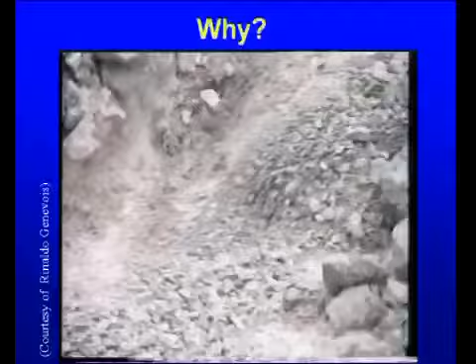I'm going to present an approach to the study of granular fluid flows I developed together with Jim Jenkins. And we tried to take into account the presence of two particle species in our flow mixture. Before going into details of the model we developed, I just want to give some explanation about the motivation that took us to the study of this kind of problem.

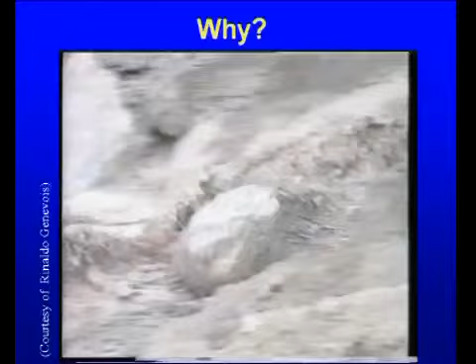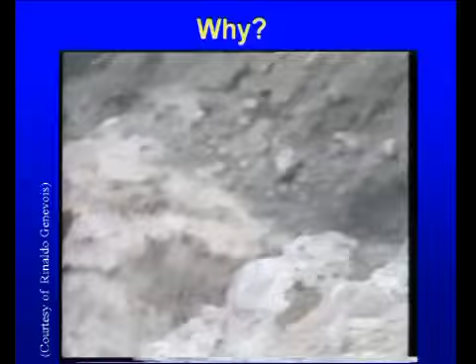I am a member of a research center at the University of Trento, which tackles the problem of the hydrological safety of basins in the alpine area. And one of the big problems we have in our area is the study of debris flows. This is a typical debris flow that took place some years ago in the Italian Dolomites, not far from my university.

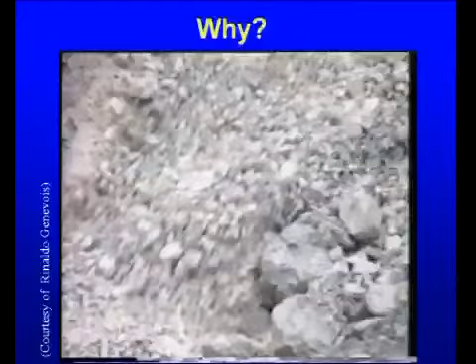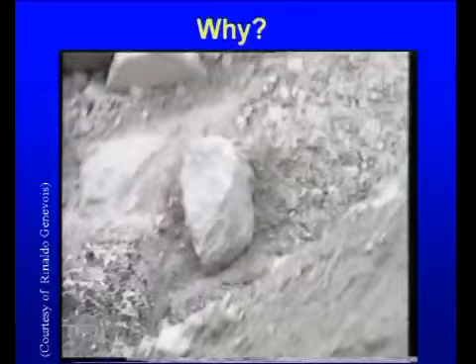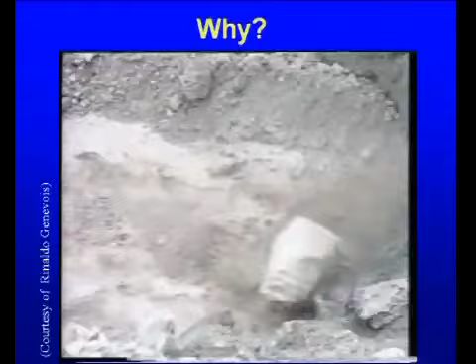What we can see looking at this kind of flows is that they are very complex. They usually take place on very steep slopes, so we have to use models that are able to take into account the presence of the slope. We have the presence of water, so we cannot renounce modeling the interstitial fluid. And we have the presence of more particle species. So in most of the cases, the models that do not take into account the presence of distribution in the size of sediments cannot give good results.

The problems related to debris flows are many. We have problems related to the triggering of the flows, to the transfer of these flows, so the transportation, and to the deposition. What we are going to focus on in this talk is the propagation of debris flows. And we will make the hypothesis of flow in fully developed conditions, so we will not take into account the variation in time of the phenomenon.

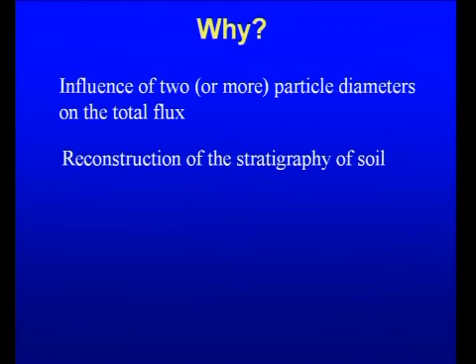The main thing that we are going to investigate is the influence of having two or more particle diameters on the total flux of the flow which is propagating downstream. This is because we intend to see if the presence of more particle species can enhance or reduce the amount of material that can propagate inside the channel, which is a very important design parameter when we want to work on the safety of river basins.

Another thing that we would like to be able to do is the reconstruction of the stratigraphy of the soil after this kind of flow stops. After that, we have the resting of the material that generally takes place on the alluvial fans. This is not taken into account at the moment, but this is something that we would like to investigate in the future.

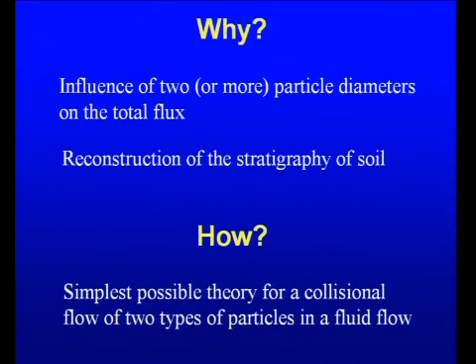How do we want to study this kind of thing? Which are the methods that we want to employ? We want to apply a theory which should be as simple as possible, just to have an idea of what are the parameters playing a role in this kind of flows. We are going to consider two types of particles, so we will have two particle diameters and two particle masses in a flow driven inside a fluid. So we will make the hypothesis of binary mixture, as I have already said.

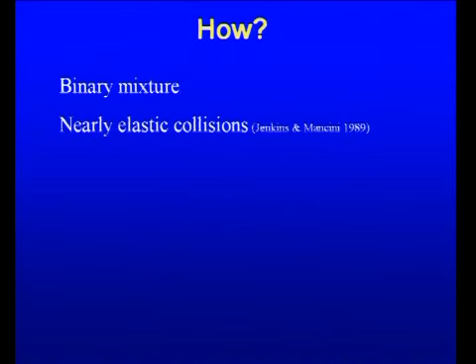Another simplified hypothesis is considering nearly elastic collisions, according to the theory proposed by Jenkins and Mancini. In order to obtain quite simple equations that can be solved without too big effort, we are going to take into account small differences in diameters and masses, where small differences mean that the maximum diameter does not exceed 2 times the smallest one.

And this allows us to apply some simplifications to the theory of Jenkins and Mancini that were already introduced by Arnarson and Jenkins. What we added to the simplification of Arnarson and Jenkins is the presence of the slope of the channel in order to take into account the effect of gravity in the momentum balance.

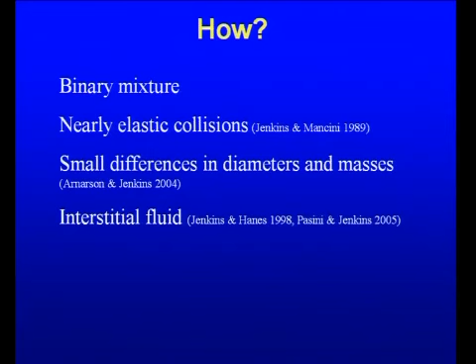Another thing that we, of course, need to take into account in modeling this kind of flows is the presence of the interstitial fluid, and in doing this, we follow an approach that has already been introduced by Jenkins and Hanes and by Pasini and Jenkins, but again introducing the role of the slope of the channel, which was not taken into account in the original works.

And our scope is the one of being able to describe flows that can be driven in horizontal and inclined channels, and we would also like to be able to study flows that can be driven not only by gravity but also from above, which means that we may have a layer of clear water flowing on top of the flow, which can be translated in the presence of a Shields parameter that, of course, is an important driving force

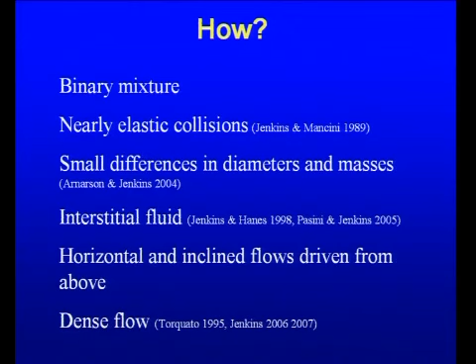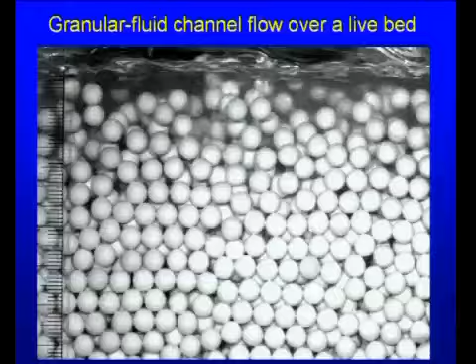in our momentum balance. Moreover, since these kind of flows are characterized by high density, the standard kinetic theory may fail in describing this kind of flows, so we introduced some modifications to the radial distribution function proposed by Torquato in order to take into account what happens in a dense flow, and we take into account also the scale distance L that Jim introduced yesterday, and that has to be introduced in the energy dissipation balance of the particles.

Before presenting the equations, I'm just showing a kind of experiment that we carry out at the University of Trento. This is carried out with one single particle diameter. We are planning to make in the future experiments also with 2 particle species. What I am interested to focus your attention on is the presence of lower layers where we have high concentration and an ordered structure in the flow.

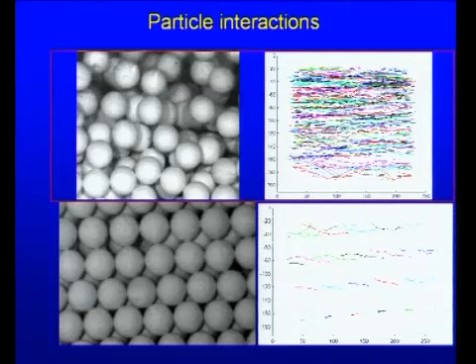So we have a sort of clustering and some chains of particles that are flowing, an upper part where we see collisions, and another part here on top where we have the dominance of turbulence and where we have to take into account, of course, the role of water. And here again 2 snapshots of the higher and of the lower part of the flows, just to show which are the very different features of the moving of the particles in these 2 conditions that are both present inside the same flow domain.

Let's start presenting the variables included in our models. Of course, we have 2 particle species, so we have 2 diameters, RA and RB, and the same we have to introduce for the masses. Then we introduce 2 parameters, the R and the M, that take into account the variation of the mass and the radii of the 2 species. And as stated before, these 2 quantities should be small in order to be able to apply the simplified equations that I'm going to show later.

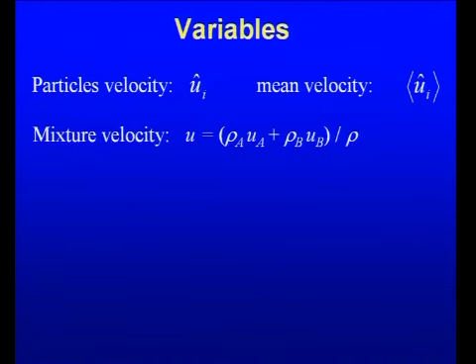We have, of course, the need of defining the number densities of the 2 species, which are NA and NB. They are connected to the mass density by means of this simple relation, and of course we can define also the volume fractions. What is more interesting to show is the fact that we have to define a mixture velocity, which is a sort of composition of the velocity of the 2 species in which we take into account the different density of the 2 species.

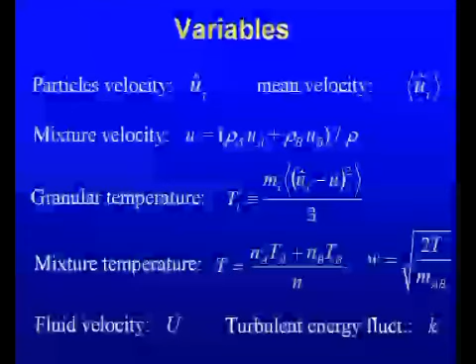We have to define a granular temperature, which is a measure of the kinetic energy of the fluctuations of the particles. The small u represents the velocity of the particles, while we'll see later the capital U represents the velocity of the fluid. And then after defining the temperature of the 2 species, here I represents A and B, we have also to define a mixture temperature, which was defined assuming the hypothesis of equipartition of energy. So this is something that we already found in Jenkins and Mancini work.

The first balance equation we have to introduce is the balance of particle momentum, which is a quite standard equation. We have the gradient of the particle pressure, the gradient of the fluid pressure. We have a term representing the gravity force, and in this term, of course, we have the presence of the cosine of phi. Phi is the slope of the channel, because we have to take into account that the normal to the bed of our flows does not coincide with the direction on which gravity is working.

And then we have a term which is very important, which is connected to the turbulent suspension of particles determined by the presence of the fluid and the turbulent fluctuations of the fluid. The closure relations we need involve, of course, the particle pressure, which is defined in a standard form. w represents the square root of the granular temperature. The term we have more is this 1 minus 3x δr, where x takes into account the number densities of the two species, and this is a term that takes into account the presence of the two particle species.

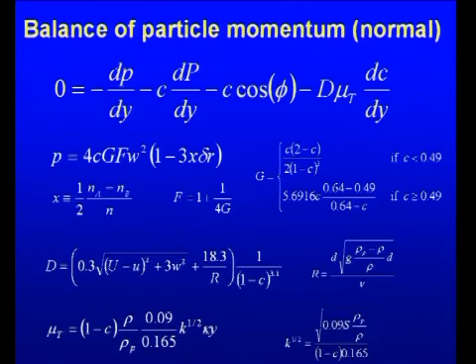This is a turbulent viscosity coefficient in which we used a very simplified expression that is based on the very simple law of the wall, which is not the best way of modeling turbulence in a fluid, but is something that enables us to obtain some simple coefficients and simple expressions that can be solved quite easily in order to get to a result.

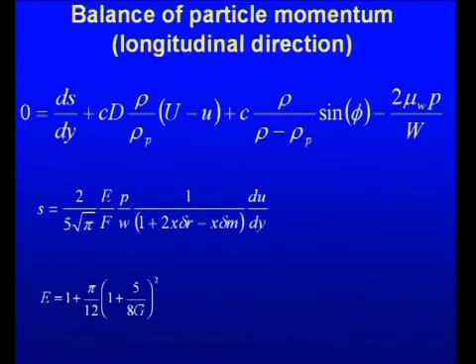In a similar way, we derive the balance of particle momentum. We have again a term including the drag, a term including gravity, a term including the shear stress of the fluid, and we included also a term here on the right-hand side that takes into account the friction that the flow has on the sidewalls of our experimental channel, or of the real channel we may analyze. We have the closure for the shear stress, which follows the classical kinetic theory, except for the presence, again, of a term that takes into account the presence of the two particle species.

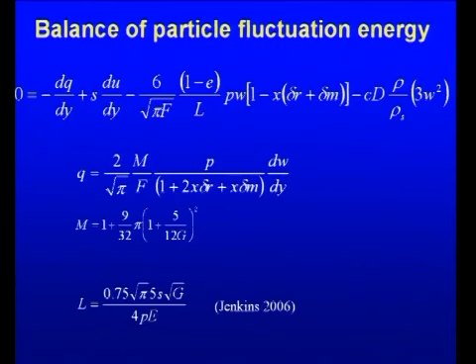We have here the balance of particle fluctuation energy, where we have the diffusive term, a production term, a dissipation term related to the particles, which includes, again, the effects of the two particle species, and includes the scale L introduced yesterday by Jim, which is expressed in the formula reported here.

Then we have the balance of fluid in the normal direction: gradient of the fluid pressure, gravity, and turbulent suspension. This term is exactly the same that we found in the balance of vertical momentum proposed for the particles, but with an opposite sign, because, of course, this is a term that transfers momentum from one phase to the other.

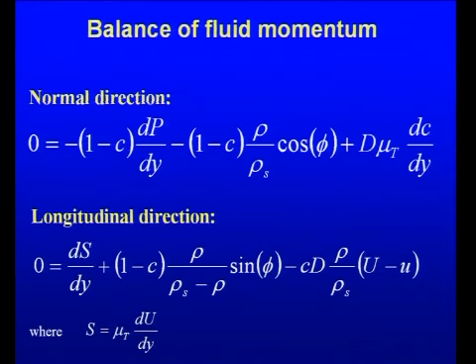And we have the longitudinal momentum, which takes into account again the gravity and the drag force determined by the difference of velocity between fluid and particles, where the shear stress in the fluid can be defined as the product of the eddy viscosity and the velocity gradient of the fluid.

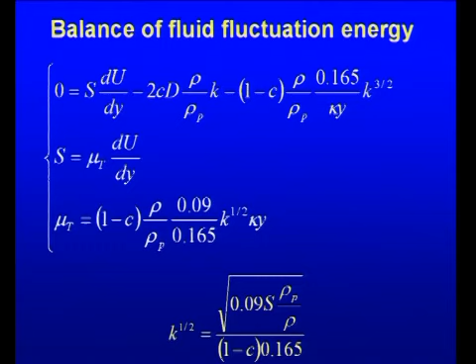Finally, we have a balance of the fluctuation energy of the fluid, in which again we have production, dissipation, and diffusion of energy. And this balance can be used together with the closure relation for the shear stress and with the equation expressing the eddy viscosity in order to obtain K, which is an expression for the strength of the velocity fluctuations of the fluid.

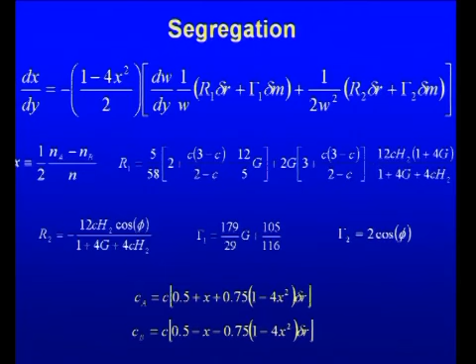Finally, we have the equation for segregation, including the parameter x we saw before, which includes the number densities of the two particle species. This is an equation which is identical in form to the one proposed by Arnarson and Jenkins some years ago, except for the presence in the coefficients of a term that determines the presence of the slope of the channel, which was not taken into account in the original formulation. And after evaluating x, we are able to evaluate the volume fraction of species A and B using these very simple formulas.

So putting all the things together, we are able to write a system which is not very complicated, even if long. It is a system of 9 equations, but it's a first-order differential equation for which it's quite easy to find also boundary conditions.

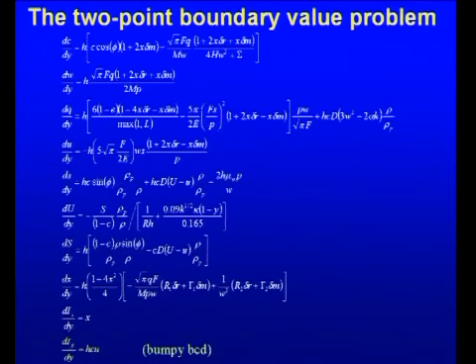We have the unknowns, which are the concentration, the velocity fluctuations of the particles, the flux of energy, the velocity of the particles, the shear stress of the particles, the velocity of the fluid, shear stress of the fluid, the relative density of the two species, and then finally a balance of mass, which is necessary in order to be sure that we are conserving the mass of fluid, of course. And in the case in which we want to study a problem on a bumpy bed, we also have to add a further equation I'm not going to talk about because we don't have too much time.

We can use this system in combination with a few boundary conditions, which are quite classical. We have a condition on the particle pressure on top, which is connected to the possibility of having ballistic trajectories on top of the flow. Then we have a condition on the shear stress of the flow of particles and of water, a condition involving the flux of energy, and again a condition involving the mass balance.

And at the bed, with analogous conditions, we can impose either the stress ratio or the concentration at the bed. The results are quite similar. We have to impose the flux of energy of the particles. We impose a zero velocity of fluid and of particles, and again a condition involving a mass balance. I will skip this.

And solving this system, it is possible to obtain some results. Here I am showing the results of a granular flow in which we have a single species. These are the graphs reported in blue in the 3 panels. And then the solution in the case in which we have 2 particle diameters having a ratio of 1.1.

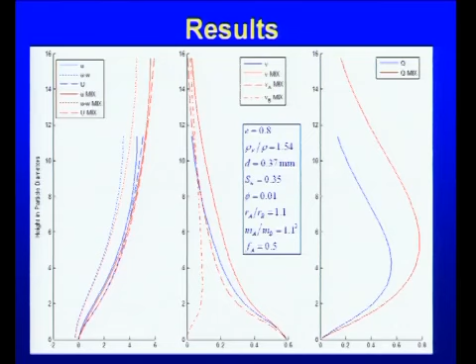So the depth increases, even if in the lower part of the flow the 2 solutions are quite similar. We have an increase in the case of the mixture of the total concentration, which is represented by these continuous curves. So we have to compare the continuous red with the continuous blue, which is for the homogeneous case. And of course, this determines a big increase in the particle flux in the problem in which we consider 2 particle species. So same boundary condition, only difference we introduce 2 particle species, and we have a flow rate which is more or less 2 times the one we have with a single species.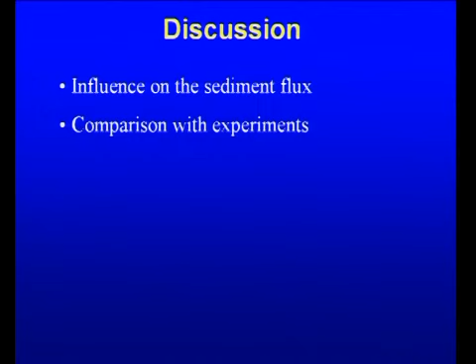I don't have more results to show you, unfortunately, because we finished this work just a few days ago. I'm just going to give a few points for a discussion. So we notice the big influence of the presence of more particle species on the sediment flux inside our flows. But of course, we have also some limitations. The first big limit is that we have not yet made comparison with experiments. This is something we are going to do in the future. We should be able, in the future, in order to model in a better way this kind of flows, to change the equations in order to take into account also ratios of diameter and mass that are bigger than 2.

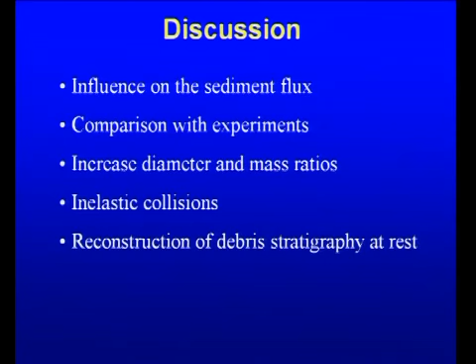Another thing we want to take into account in the future is the presence of inelastic collision. Our model works for nearly elastic collision, which means that the coefficient of restitution should not be smaller than 0.8, which may not be very appropriate in the kind of fluid we are studying, especially if in water. We would like to build the debris stratigraphy at rest, and this is all.

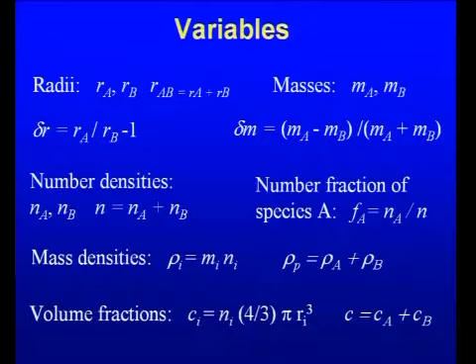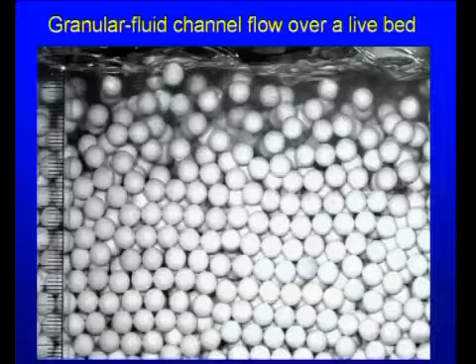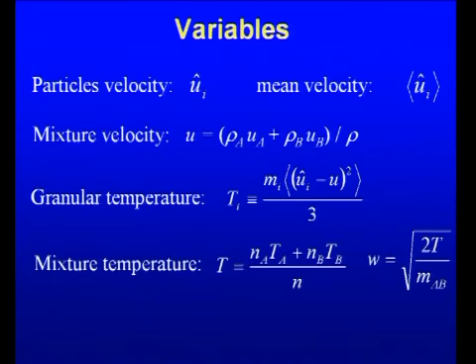Go back to where you introduced the granular temperature, the second or third slide. So, what surprises me in all these theories, you may want to comment on that, is that you have one... Oh, you've gone too far. Go forward. Yeah. You have one temperature, and you mentioned equipartition. Now, there's an alternative theory by Dufty, and he introduces 2 temperatures, and then he says, if I let the bed relax, you do have 2. Yes. I have 2 temperatures, yes.

Right, but you only work with the mixture temperature. I only work with the mixture temperature, yes. This is in order to have a simplified structure of the equations. Otherwise, the system of equations becomes much more complicated. Of course, this is a simplifying hypothesis. It's a simplifying assumption, you're saying? Or is it fundamentally true that there ought to be some form of equipartition? I think it's a good question we may discuss for the entire afternoon. The first thing we can do is make some laboratory experiments to see how far this hypothesis can be investigated, and then we can see what to do. What I can say is that removing this hypothesis complicates a lot our problem.

And would you use Jonathan's PEPT experiment to determine that? Or am I a dishonest broker? The answer's maybe. That's the sort of thing we need to know, John. It is.

Maybe one quick one. What are the physical mechanisms for the segregation that you produce? This is a good question, in the sense that here we are not taking into account the classical mechanical sieving mechanism. Everything is just based on energy, on velocity fluctuations and on the kinetic theories. So this is also something that I want to investigate more deeply, because some of the results are not convincing me very much.